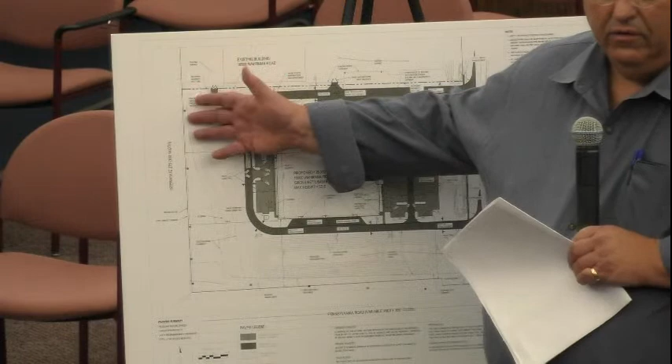Then at the same time, all the natural material on I-275, we don't want to cut it down and plant new trees that are smaller. We think that the current vegetation is a better solution for the community here.

I think we've met all the requirements for parking, lighting, utilities, and access for fire trucks to go around the perimeter, to cut through the actual site of where one of the parking lots is. And this is like a storage area here. So kind of what happens is that the raw materials would come in and drop off here.

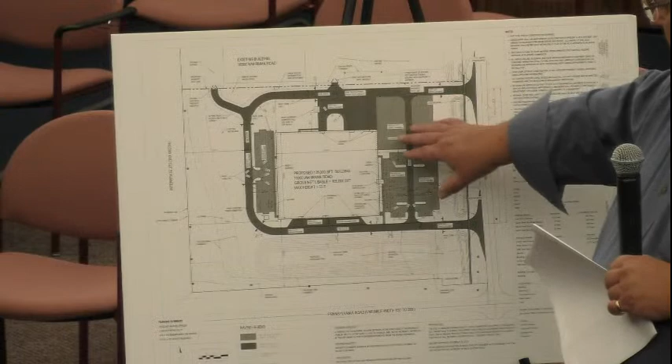And everything would just sit outside here. They would come out with forklifts, remove the raw materials. Then there would be an assembly line process that would take it from the south side, build it through the building, and then come out the north side. And they have these large moving devices that would pick up the modules, bring them out into this area here.

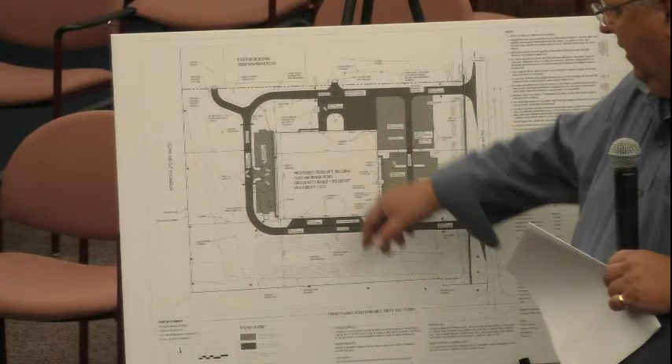And then we would store them until they're shipped out. So, as previously described, these are built for an actual project. It's not like they're built and waiting for somebody to come by. So they sit here for a short duration until they're shipped out to the site for construction. So the flow is that there's no trucks pulling in and out of the actual building. They all just come in, get a load, and then they leave.

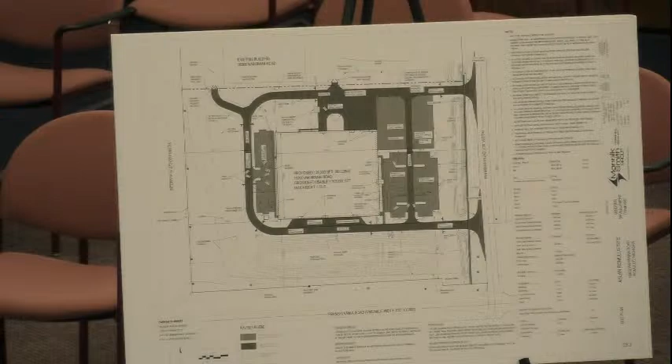One of the other things is that there was concern about what we would see from Warman Road. So we went ahead and added and supplemented a lot more landscaping on Warman than what's currently out there. We actually added it—I got the wrong drawing, I apologize. We extended the berm in this area here. That should be on your plans. I can pull that up. Sorry.

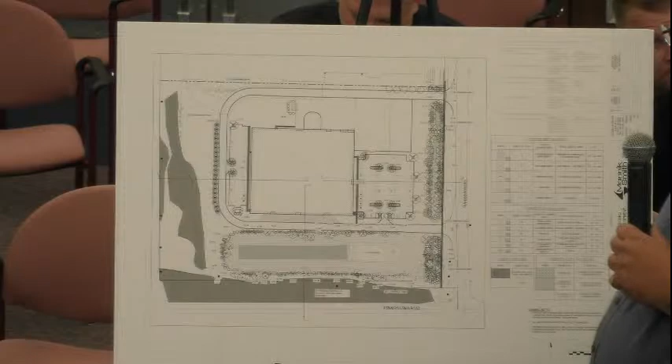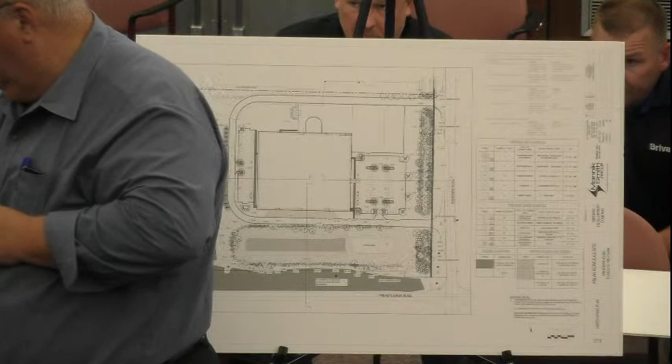Well, the plans that you have in front of you show extended landscaping that comes west of this driveway to buffer any of the sight distance that comes in here. That would be on sheet 7.0. With the photometrics, I think we met your requirements of greater than 3 and less than 10. And the landscaping, again, we're asking for the variance of the landscaping along the west side of Pennsylvania, as far as the landscaping that's out there now. The parking requirements, we're just over by, I think, 1 right now.

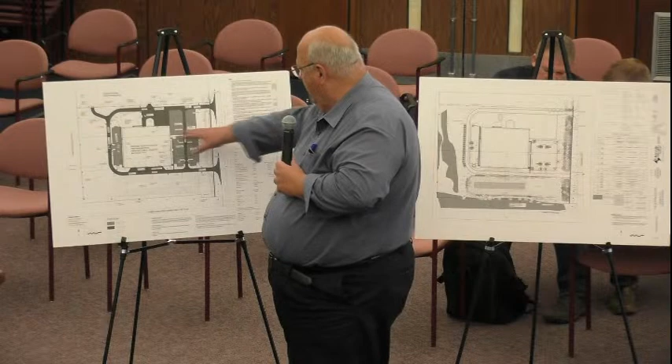And the only other thing that was discussed was whether we should have a sidewalk that comes from Warman into the site. We were told there are a lot of security concerns, and we don't have a fence—we're not proposing any kind of fence—so we would prefer not to have pedestrian access that would walk into the site from Warman Road. I don't know, are there any questions?

Madam Chairman? Go ahead, Mr. McAnally. Through the chair to the petitioner: I don't understand when you say security concerns. Are you concerned somebody's going to carry one of these prefab panels on their back and head to the road with it? What are you concerned about with the sidewalk? You mean coming from the site in? Yeah.

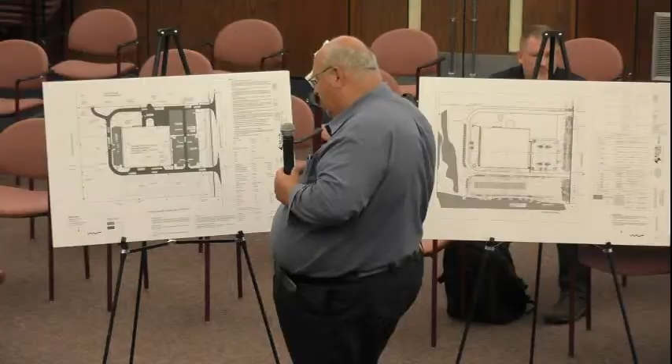Well, we're going to have cars parked there—private cars. I've just seen a lot of buildings, and a lot of them have a sidewalk that ties pedestrian traffic to the existing sidewalk out front from the front door. So David, if I can jump in, yes.

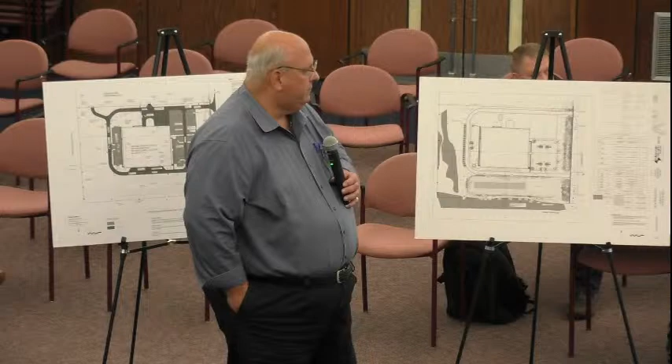With the 3D volumetric boxes that we plan on building, once they come out of the factory and into the staging area, they are completed units on the inside. So all the cabinetry, all the appliances, everything is loaded into these units, and it's very easy to get into those if one person wanted access. So from that standpoint, it's more of a concern about what's inside the module that potentially could be taken or removed. Again, I don't see a sidewalk being the stopping factor of somebody that wants to break in and take your stuff.

Yeah, true, I see what you're saying, but it seems a little bit more inviting to us. So we'd be open to thinking about that, but just having a sidewalk where people can walk through, especially during daily operations, could potentially be a safety hazard as well. The sidewalk just goes to the front door, it doesn't go through the middle of your factory. True, but there are occasions where trucks could be coming in, and these modules are fairly large, so visibility could be an issue. Modules will be coming out of the lot at various times throughout the day, so we were just erring on the side of caution to limit the amount of foot traffic in that area.

That's all I have. Okay. Mr. Paul, are you the engineer of the project? Yes, I'm the civil engineer.

So have you looked at that drainage system, the forebay? I was out there and walked it, me and the mosquitoes today. I couldn't even find the pump station, it's so enclosed. I found the basin standpipe, and the forebay has, I think, a problem. They've dug a drain from the forebay right over to the basin, and the forebay is there for a reason, not to drain it over there. I think you've got to take a serious look at that. It's so overgrown you can hardly get in there. I never did find the pump station.

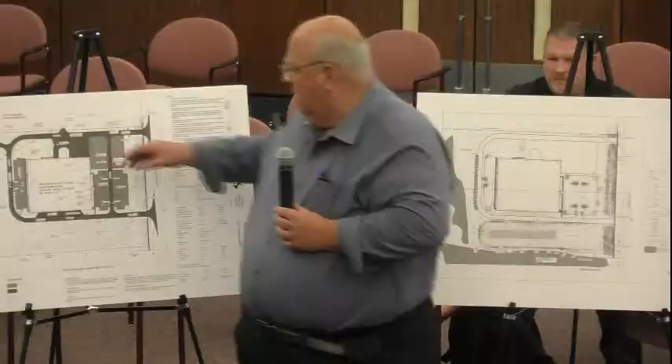The other thing that has to be shared is the current building's fire access route that comes on the south side of their building, on this property. So we're constructing a new paved road from their road over into our fire loop system, and another driveway back into their system. Instead of that being a gravel surface, it'll be paved, connecting the two. That has to be a shared agreement allowing those fire access agreements to use it. That agreement's got to be undertaken fairly soon.

Yeah, I didn't have too much trouble with the building. I was just concerned that you're aware of the retention, the forebay, and the pump station. I assume it's there — it is, it is, I don't have my Google up right now. No, that's all right, you're the one going to deal with it. So it'll basically have to be resized, it won't even be reused, we have to put in a brand new one.

Thank you, that's all I have, Madam Chairman. Mr. Graff, and then Mr. Frederick, through the chair, I have a question for you regarding these modules.

I see your proposed parking lot is asphalt. These modules, in the pictures you guys have provided, show them being staged, and I see a trailer frame there. I don't know what those modules weigh — maybe we need to set them on concrete.

So the weight of the modules with all the materials inside is approximately 40 pounds per square foot. We're looking at modules ranging in size. On the large end, it would be about 1,000 square feet.

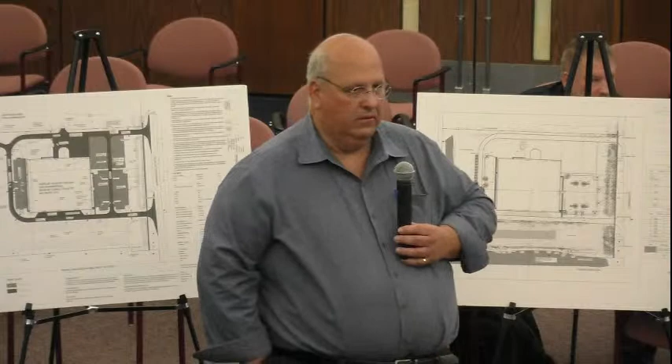Another question I got - we're in early stages here, but are you guys planning on having any fuel on site? Diesel fuel, gasoline? To my knowledge, no. Okay, all right. All activity takes place in the building, right, and it's just hammers, nails, just like you're building a house. Well, you're going to have forklifts there, you're going to have propane or diesel fuel. If there's going to be a tank on site, I want to see it.

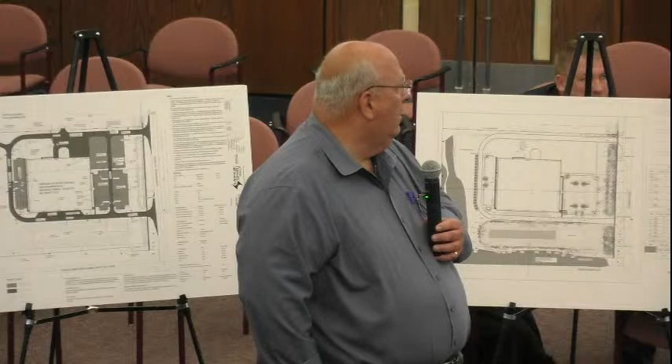So the plan is to use propane and battery. We want to use batteries as many opportunities as possible. We haven't decided which equipment we're going to use, but the plan is to use as many battery-operated machines as possible. Thank you. Yeah, no problem, anytime.

All set, Madam Chair. Just a couple things. First, I remember the history of that site. It was all supposed to be Logos Logistics, Phase 1 and Phase 2. That's why the fire road was gravel-based, because it was going to be removed for the extension of Logos heading south. We also waived building appearance requirements on that south face because it was a hardship, since they planned on expanding. So that's in memory there. Also, the forebay and the detention pond were built for the Logos project to handle Phase 1 and Phase 2 at that time.

So any deficiencies in the forebay and the pond pre-exist. What did they approve? I think they approved it, but they did not approve the drain, or the ditch, from the forebay over to the main drain. Right, but that's current. I'll say the property owner, or whoever's controlling that property, is responsible for that. I think that's these gentlemen here - they're going to have an agreement with Logos, so I think that's their problem.

And I see the new fire route around the front of the building is going to have a Knox box and a gate. So that falls into, when it snows, that's got to be clear also. And to this report, the OHM report, I see on page 3, under architecture, the following are recommended: the proposed 8-foot of block along the east, south, and west elevations is acceptable in its appearance. And it's still recommended that a 6-foot minimum height of block is added to the north facade for building protection, especially due to the use of forklifts and material handling in the adjacent area. So I look at our rendering here, and it's all metal on that side, right to the ground.

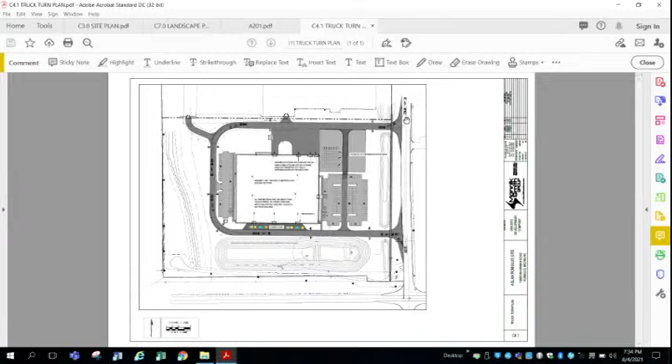So trucks will be able to come from the south into the site, come up this way, come up to here and turn in. So they'll come north and turn in? Yes. And then they could also come south and turn in? Correct, at the northerly drive. Okay, and they go around the building, do what they do, and come out the other way.

Now, when this building is in full operation, is that going to be the same traffic flow pattern? Yes. Okay, and they don't get a lot of trucks here? The delivery trucks, I don't know, we have it on the site plan, I think it's 5 a day or 4 a day or something like that. So very few trucks coming in and out here.

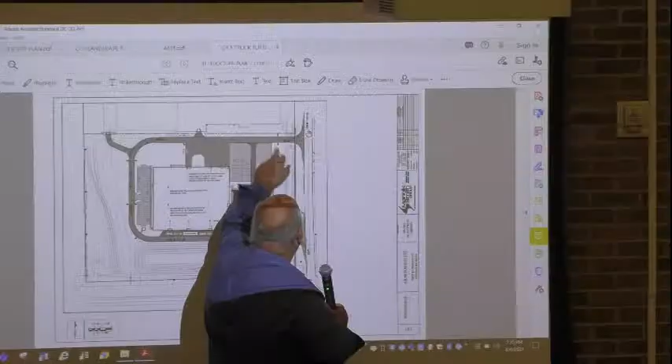Okay, and we'll have directional signage, property signage on the property for driving in and out. That's what these are right here too, these are no parking. So it's signed for no parking, fire lane.

Okay, yeah, that was going to be my major concern, to make sure that we have signage over there. And also, that place right now there's not a lot of traffic going on, and I want to make sure it stays that way too. And if trucks are coming both north and southbound, I want to make sure it doesn't create congestion at that point, since there's only one way in and one way out. Want to make sure it's not backing up and creating unnecessary congestion.

So this is the fire truck route. I showed you a truck route, and there's two of them, there's a fire truck route. So the driveways are set up so that fire trucks can come in either direction. Okay, and that doesn't matter. And the geometry is set up that way for the widening. These are the signs that will be posted here, here, and there, throughout the site.

Okay, and then two more questions. The loading area, in the schematic diagram, you have the trucks kind of facing the exit. Is that the way it's going to be loaded, or would it be more backed into the dock?

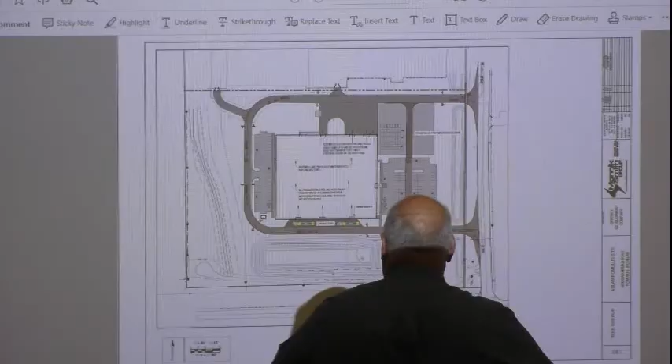No, these will be in this configuration, they don't back in. So are they going to be loaded with forklifts? Well, they come out with a forklift and unload the materials.

So David, if I can help. The southern elevation, where the trucks are shown right now, is raw material unloading. They'll take those off via side removal from the flatbed trucks, bring those inside the facility, and run their operation from there. The north side is the finished product unloading. East, 2 overhead doors - finished product will exit those doors. They'll come out and stage for a short time in the northeast staging area.

And then my final question is, where do you intend to dump the snow when we have snow? Well, we do have ample green space on the northwest corner, as well as area along the outer road and within the storage to the northeast area as well. So I believe based on total operation, there's ample space within the area to remove snow. Obviously it depends on the snow loads and what we get for the season, but we believe there's ample area.

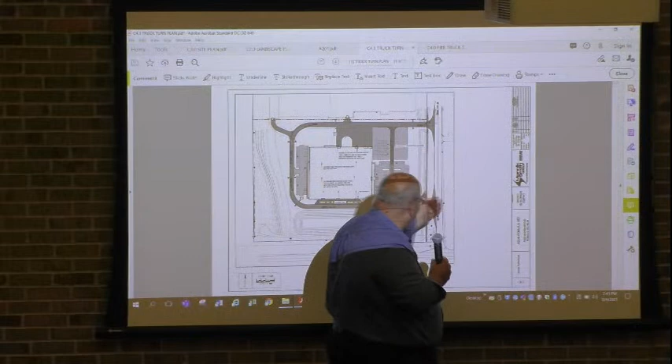So we just showed it that way, even though the main route would be going backwards. The questions kind of arose from protecting yourselves, because currently in our city, trucks are going everywhere. They're not supposed to be. I mean, it's an epidemic.

I'll use that word, because I live in a subdivision on the other side of the city, and yesterday a double bottom truck heading for a Home Depot warehouse came through my subdivision. He had zero business there, he's from Oklahoma, so I'm sure he was just following his phone's GPS. He got himself in trouble, potentially. He didn't hit anything because I was watching and followed him, but he went through a residential, 300-house residential area, with sidewalks and a non-divided road. I just wanted to say, don't get on that list.

Right, you guys must have a weighmaster too, don't you? Nobody does, we need one. No, you're on township. The money from the weighmaster would go to the library, it doesn't pay for that guy's salary. It can be changed, Granholm made it so. Wayne County's only got one or two, so he's stretched pretty thin.

There's just a growing concern in this city about where trucks belong and do not belong. It's not that it's the wrong business, it's just sometimes the wrong location, they say. And the trucks have just been, it's been like the Wild West.

Well, we're gonna, like John was saying, have signage that says, and it might be on the sheet here. That's what a few of our petitioners have been doing, is signing their truck route, in you know, out. This is turn left only, kind of an exit sign.

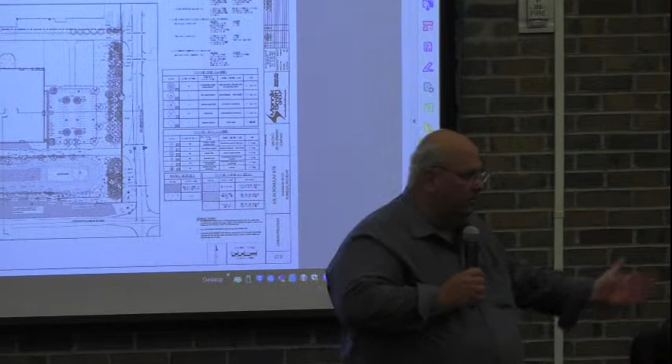There will be a maintenance plan for all the landscaping going forward, so they'll maintain that. Through the new plan, we dissect the berm with the trees at the two locations, but the new landscape plan also supports additional vegetation on that berm across the frontage. So will some of those trees along the way be touched, since they're dying? Yeah, there's a significant amount of enhancement to that berm, over and above your code requirements, basically. Right, and somebody's got to replace a number of those trees.

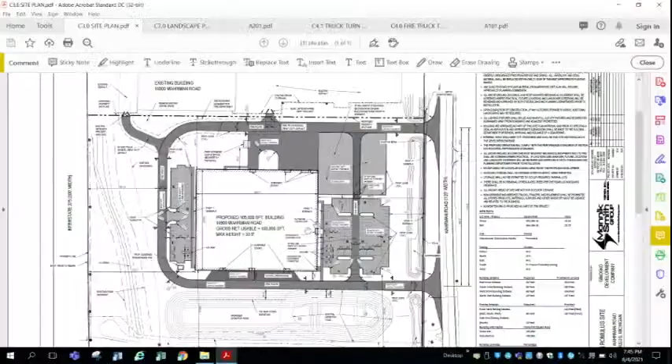And then we have the 4 overhead doors to the north. The primary use overhead doors to the north will be the 2 on the northeast corner, where the finished product will exit out of the facility. But if you were to see the inside process layout, material comes in from the south, gets assembled from west to east, finished product moves across the facility, and then exits.

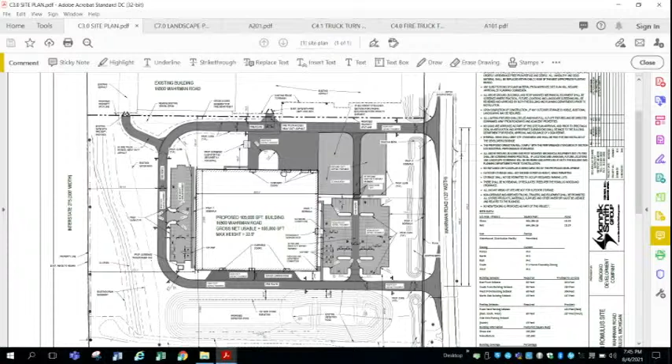So just like any other operation, if there was a delay in raw material or something, and they needed to move units in and out, they have 2 additional overhead doors to the north where they could pull out a unit and replace it back in line somewhere else, just in case they're waiting for some raw materials.

So you say you have 5 to 7 trucks a day? Is that 5 to 7 trucks in and 5 to 7 trucks out? No, 5 to 7 trucks total is expected, coming in and out. So basically, 3 trucks come in, unload, those 3 trucks leave, okay? And then you have your finished product that comes out the other door, and then you ship that out. How many modules do you ship out in a day?

Based on our projections, we're looking to ship anywhere between 8 to 12 a day, with the average being 10. And how many do you put on a truck? At one time, just one. So that would be another 8 to 12 trucks a day. When we're to the point where we're delivering to the site, yes. So it would ramp up slightly when we're delivering these boxes to the site. 8 to 12 to me is more than slightly, because you're doubling your truck count right there.

Let me speak to that. The most that the factory can actually produce is 5 modules a day. Can you speak up, please, into the microphone? We can't hear you. So what we're talking about is what happens in year 3. Our financial projections show that the most number of completed modules that can be done is 5 a day, okay?

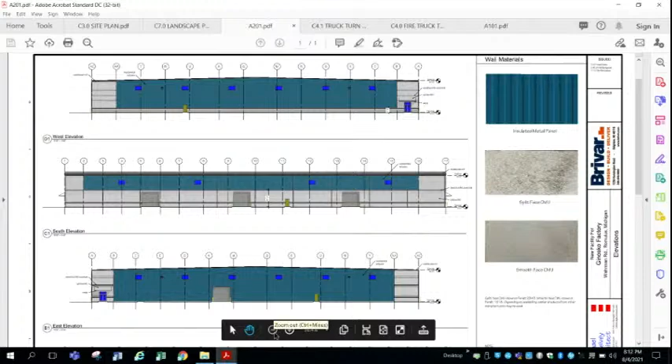The windows and the louvers, as indicated on the plan, will consist of an aluminum punched window system. This is representative of what the windows will look like, and also what the 2 main entries will look like. So on the east elevation and the west elevation, the 2 entries there will consist of an aluminum storefront entry system. The balance of the man doors, 3, 4, 5, will be standard metal, hollow metal frames, metal doors, insulated systems.

It'll be a pre-engineered metal building with a standing seam galvalume roof system on it. It'll stand there for quite some time. It is what we at Brivar do on a regular basis.

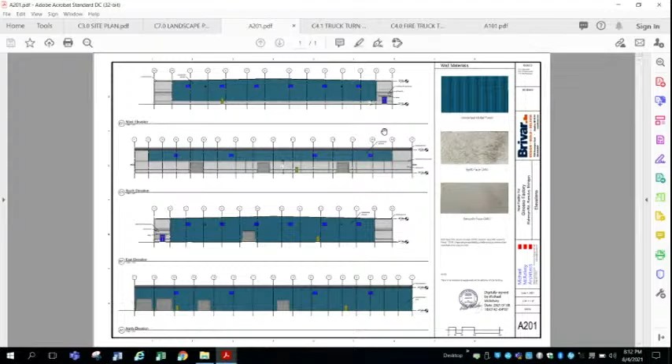It will look like a high-end finished product when it's done. With the assistance of your team, we made several suggestions. We've incorporated more masonry, the pillars at the end, and additional masonry walls, just to give it a little more depth and texture. We've also incorporated an awning at both of the aluminum storefront entrances so there's a little more depth there.

We'd like to maintain that awning with a little bit of color, so I think we're going to go blue with that, just on the fascia, so it's got a little bit of color to go with the coloring of the company. So you're saying those will be a little bit of blue? Just the fascia on the awning.

It hangs right out, so it'll be a flat awning with kickbacks, kicking back to the masonry. And it's not electric blue? No, no, possibly a blue closer to that. Oh, that's good, yeah.

I like those, it'll look nice. The drawings you have show the correct colors. This is a previous rendition that your team helped us move more towards something that would meet your guys' approval. Okay, that looks good.

Any other questions or comments? Okay, Madam Chairman? Mr. McAnally.

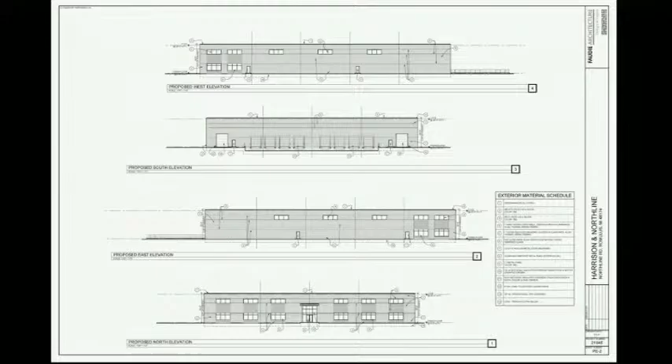Hello, Mike. Haven't seen you in over a year. Yeah, it's been a little while.

Mike Brock with Hennessy Engineers, here with Nino to discuss his building on the southeast corner of Harrison and Northline. The property right now is vacant. We propose a 54,825 square foot building with a vehicular parking lot on the north side of the building with a drive approach onto Northline, and then truck traffic would enter the south side of the building off of Harrison.

We have a truck dock on the rear of the building that will allow for loading and unloading, and some trailer spaces on the south side of the parking lot. Utilities are served with public water and sewer, and to the east of the building there's the Frank and Poet drain, which would be the stormwater outlet. We plan on collecting the stormwater and detaining it in an underground detention system, similar to what we did with Aerostar on the east side of this building. It'd be the underground open bottom arch system of detention, which seems to work pretty well.

Photometrics-wise, most of the lighting would come off the building itself, having very little effect on surrounding properties. This shows the property. It's that vacant lot in the corner, the southeast corner of Harrison and Northline, with Aerostar Manufacturing to the east. I believe there's some residential there to the west, but it's all zoned industrial, if I'm not mistaken.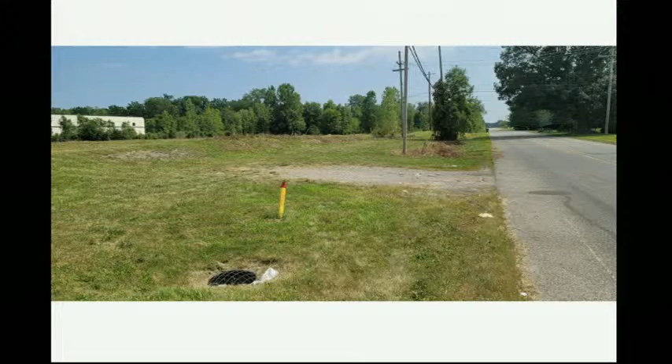You can see the drainage, the Frank and Poet on the south and the Packer drain on the east. Just a couple of pictures of the property: that's one looking from the corner, that's one looking down Northline. You can see there's that small berm right there that would be enlarged, reshaped, and heavily landscaped. It's there already. This is looking down Harrison - again, there's that small berm that goes along the edge of the property there that would be enhanced, enlarged, and heavily landscaped.

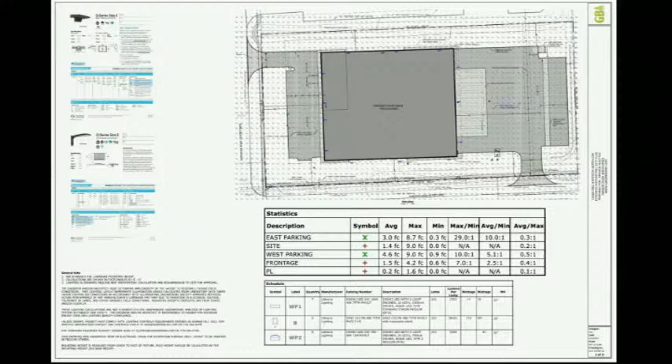As Nino said, they don't really have a tenant right now, so we're kind of guessing at the truck traffic and vehicular traffic counts at this point until a tenant does come in, at which point we'd be able to better understand what their needs would be. We got that.

That's kind of about it in a nutshell. I guess I'd entertain any questions anybody might have.

Through the chair, I have a question. I researched your StormTech system for your underground water retention, and I see those are plastic arches. You mentioned you used them on another site. So you have no problems with weight restrictions on them?

Nope, they're all H20 loaded. They require at minimum 2 feet of compacted stone on top of them to try and make a bridge. The arch shape itself, when you look at ancient Roman times, it's used back then. It's a really strong shape. Jessica, correct me if I'm wrong, we use them all over. They're designed for that. We actually used it on the 7-foot addition on the Aerostar.

Right next door to this one, in the back there also, right by the truck well. Yeah, it's a nice drainage field. It's large. There's going to be a lot of dirt coming off the site because of it, but you gotta do what you gotta do. It's all clay.

Is that it? Sure. Mr. Frederick, side note on that comment by Mr. Crowell.